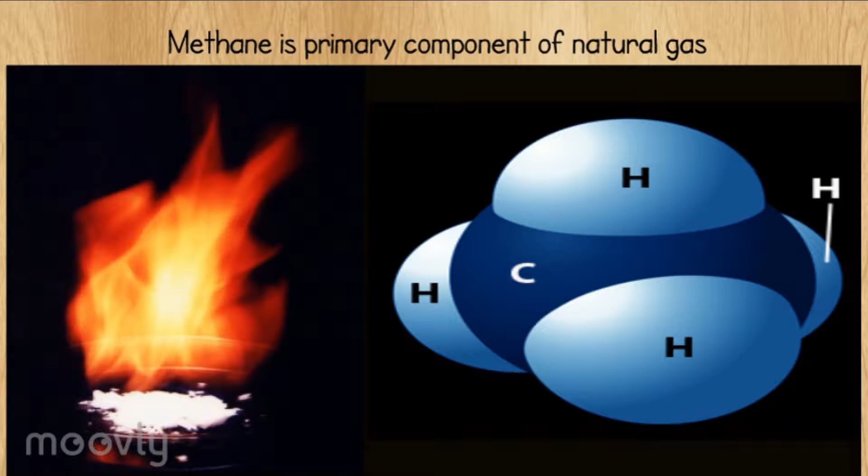Result of burning methane. Methane is a primary component of natural gas. Methane chemical reaction. Calorific value of natural gas. Natural gas has a calorific value of 43 megajoules per cubic meter.

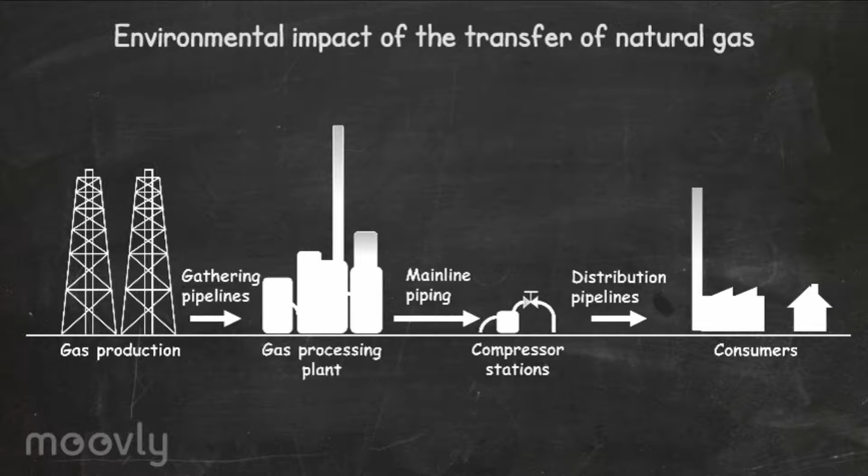Natural gas can be transported on land and under the water by pipeline, or on water via ship. There are basically three types of pipelines: the gathering, mainline and the distribution systems. LNG is most commonly transported with vessels, which contain fixed LNG tanks for coast-to-coast transportation.

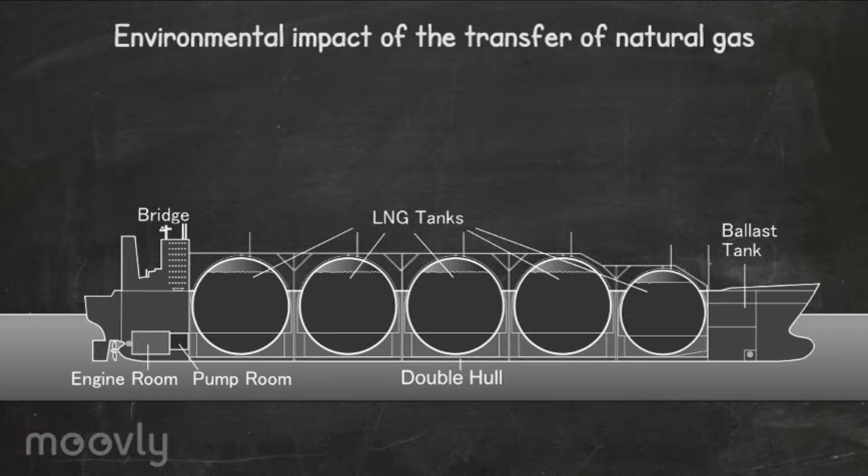In the port of departure, the natural gas is liquefied and pumped into an LNG carrier. Because the LNG tanks cannot be made completely insulated, part of the liquid natural gas vaporizes. This phenomenon is called boil-off. On older vessels, boil-off gas is used in a turbine to power the ship, and if more gas is needed, the additional gas must be vaporized from the cargo.

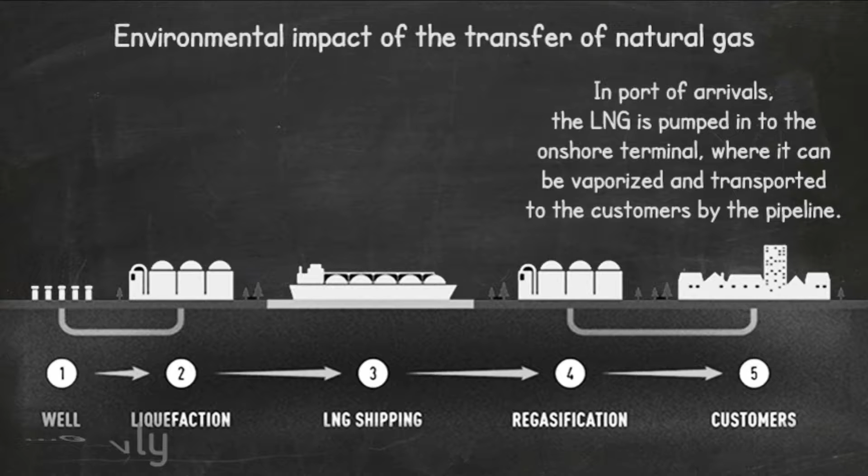The newest vessels have a boil-off gas reliquefaction system, so boil-off gas can be liquefied back into the LNG tank. In the port of arrival, the LNG is pumped into the onshore terminal, where it can be vaporized and transported to the customers by pipeline.

Positive environmental impact of the transfer of natural gas. When natural gas can be transferred to the customers, they can use the cleanest fossil fuel in the world. By using natural gas for industrial applications, transporting and housing, the generation of fine particles and harmful compounds can be reduced significantly. Negative environmental impact of the transfer of natural gas.

Because methane is a 23 times more powerful greenhouse gas than carbon dioxide, leakages in pipelines and LNG boil-off gases cause serious issues to the ozone layer. Old mainline pipes are made of cast iron, which are aging, and the probability for pipeline damages increases all the time. American gas suppliers have reported half to 10% losses in pipelines, but clear facts and figures are not available.

When there is need to build a shore-to-shore underwater mainline, construction could cause release of toxins from the seabed. In LNG transporting, there are also environmental problems. A part of boil-off gases may release to the atmosphere, and energy losses in the liquefaction process are 10% of the total amount of energy of the gas, because natural gas has to be cooled down to under -160 degrees Celsius.

It has been said that natural gas is the cleanest fossil fuel on the planet, but the resulting leakage emissions of the transfer make its environmental advantages disappear when it is compared to other fossil fuels. Natural gas emissions in traffic. Worldwide there were 22.7 million vehicles running with natural gas in 2015, led by China with 4.44 million vehicles.

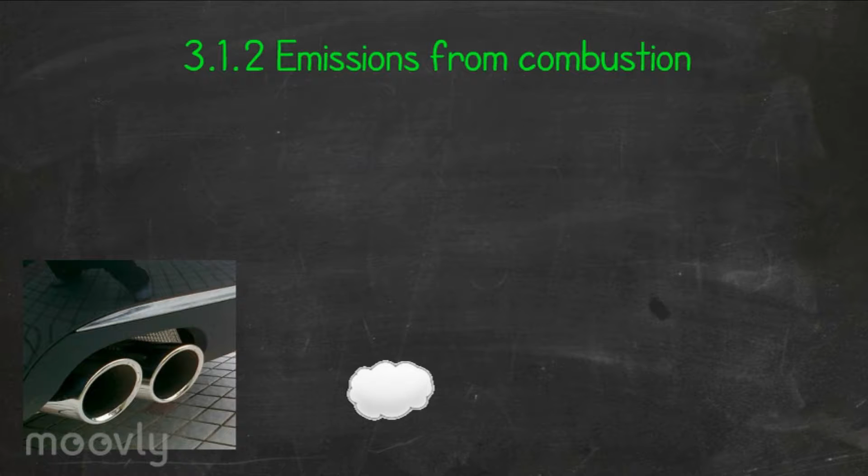Natural gas in vehicles uses compressed natural gas, CNG, or liquefied natural gas, LNG, as a cleaner alternative to other fossil fuels. Natural gas has the highest energy-carbon ratio of any fossil fuel, and so it produces less carbon dioxide per unit of energy. When combusted, natural gas only releases a small amount of flue gas, because it is composed of over 90% methane and it burns clean. If combustion is clean it will only generate water and carbon dioxide. It doesn't produce ash particles like oils do.

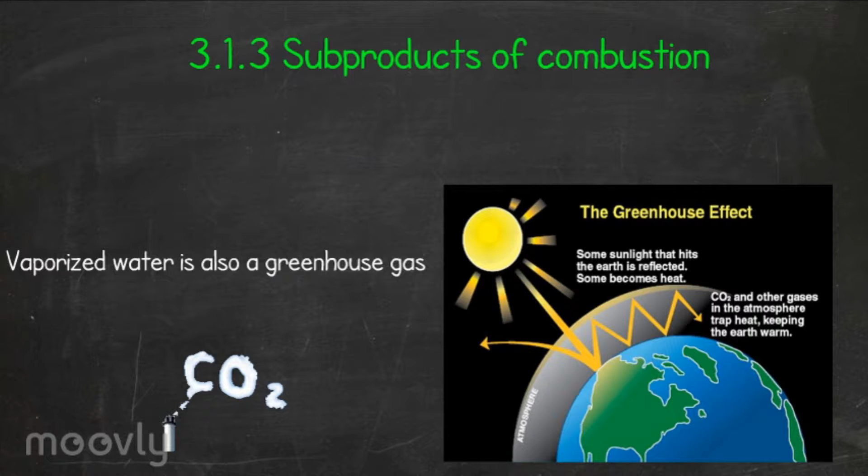The most important emission is CO2 emissions. CO2 is a greenhouse gas which causes atmosphere heating. Water vapor is also a greenhouse gas, but there is no emission standard for that. There are always some harmful emissions when the combustion isn't perfect. Natural gas has the least carbon dioxide emissions compared to other fuels. It has the best value in terms of other fuels.

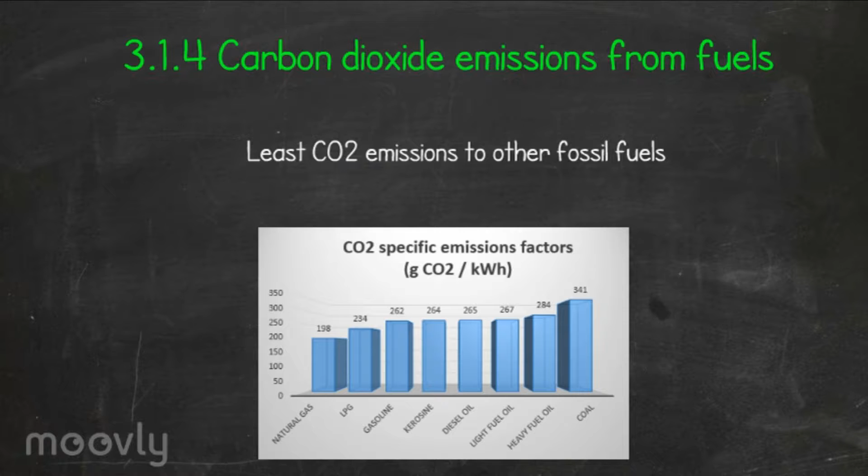Carbon dioxide emissions are 25% lower than with heavy fuel oil. NOx emissions are 90% lower. There are almost no SOx emissions with sulfur-free natural gas. Natural gas-fueled vehicles are also quieter. Emissions are reduced considerably with CNG usage. CNG is better for the environment than diesel.

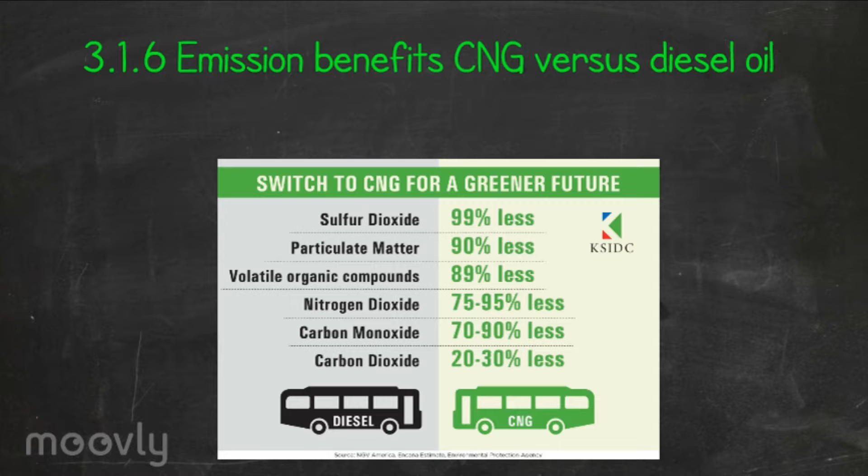In vehicle inspection, a flue gas analyzer is used to measure CO, CO2, HC and O2 emissions. Other emissions like NOx, SOx, volatile organic compounds and particulate matter are analyzed in a laboratory. Small portable laboratories like PEMS can be used for this as well.

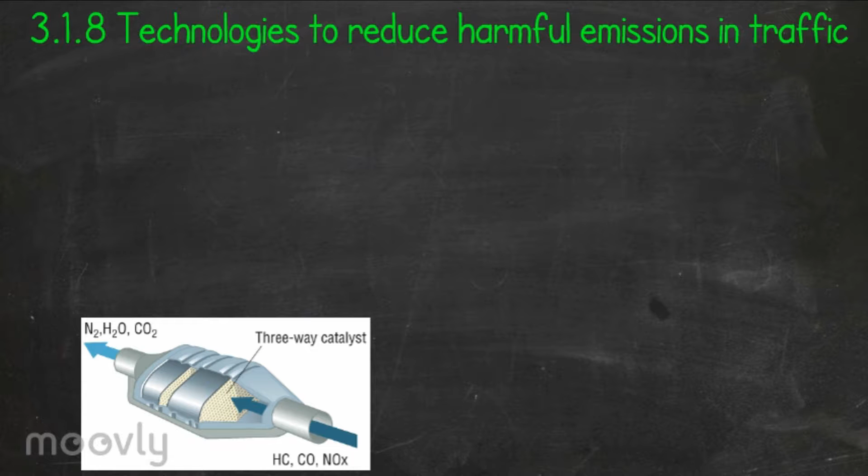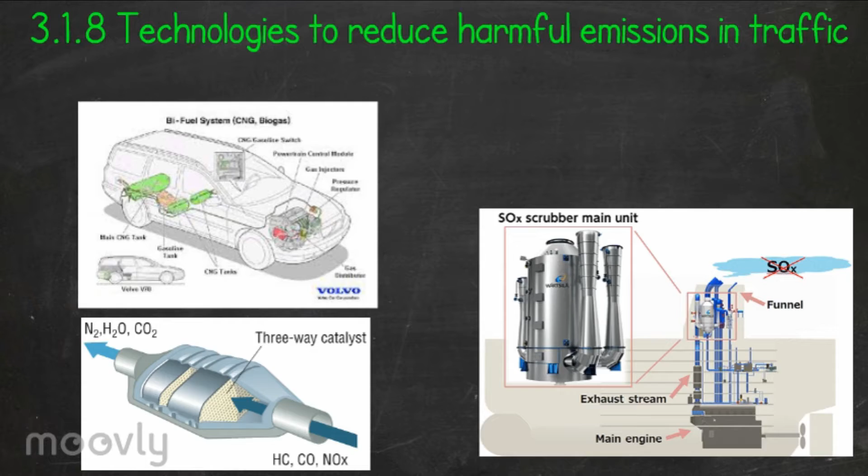In cars, a catalytic converter is used to reduce harmful emissions in combustion of biogas and bi-fuel. In LNG ships there is no need for scrubbers to reduce sulfur oxides. On land vehicles, natural gas is taxed either by CO2 emissions (g/km), told by the manufacturer, or by the car's weight, cents per 100 kilograms a day. At sea, LNG is bought abroad, so there is no tax, only the fuel price.

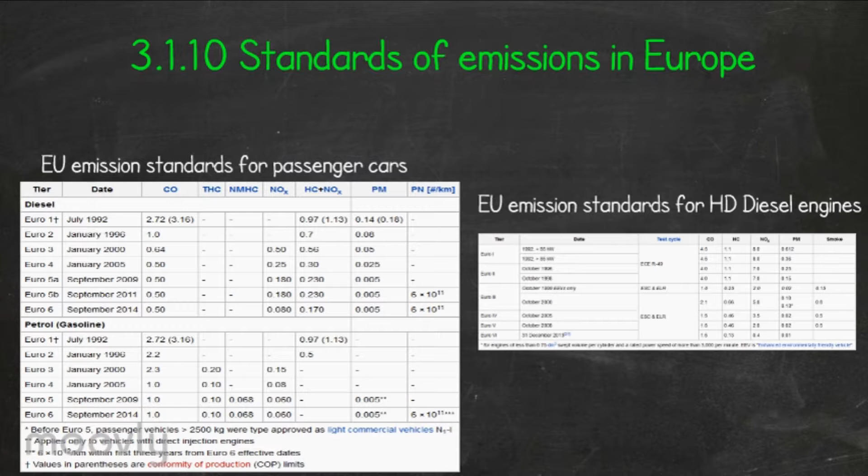The European Union has its own set of emission standards that all new vehicles must meet. At the moment standards are set only for road vehicles. No standards apply to ships or airplanes. For each vehicle, a different standard is in use.

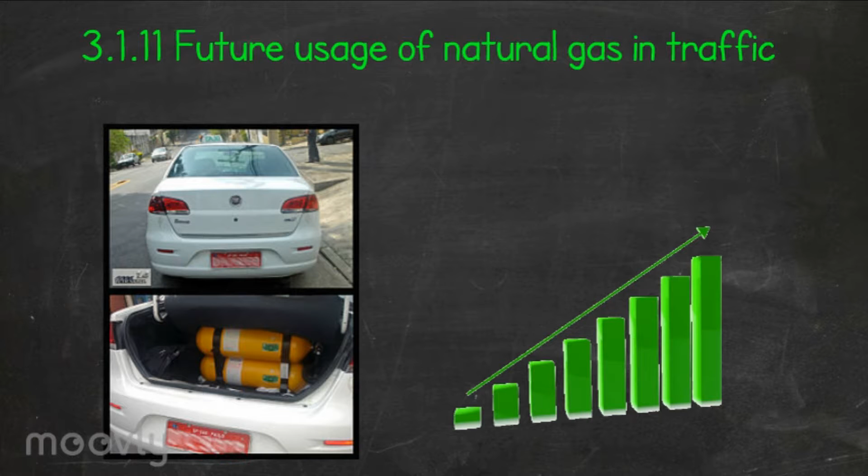In the future CNG and LNG usage in traffic will increase. Bi-fuel cars will become more common. Natural gas causes less harmful and toxic emissions than traditional fuel and is becoming easier to attain. In the future, there will be more filling stations for land vehicles.

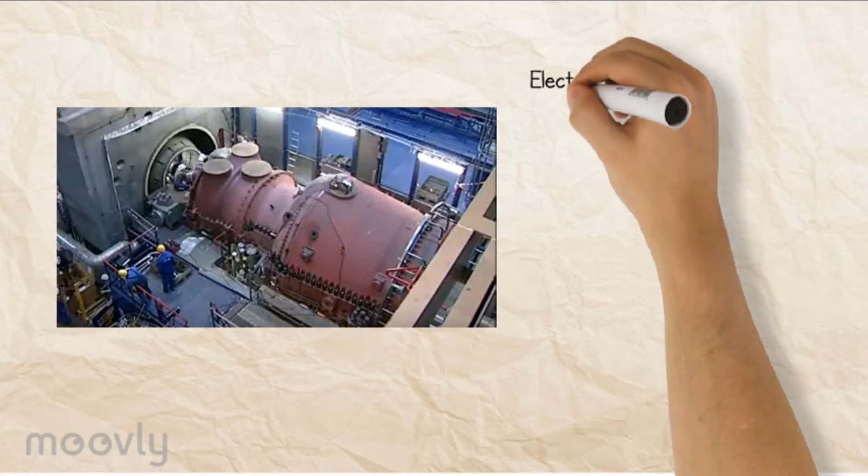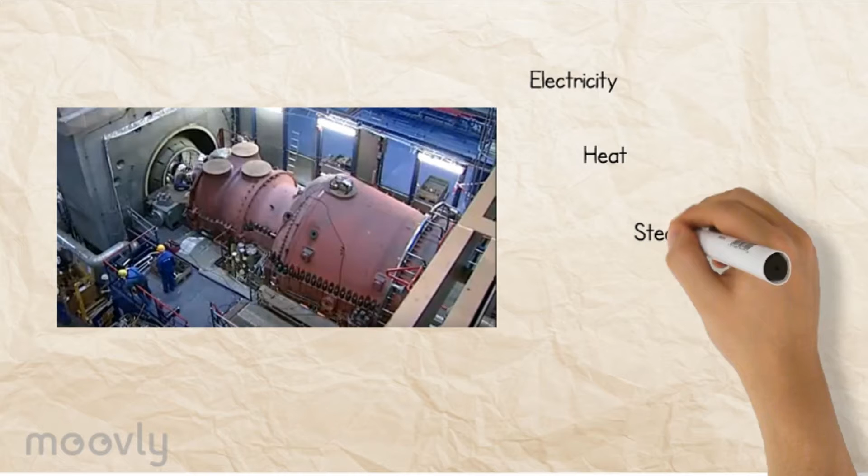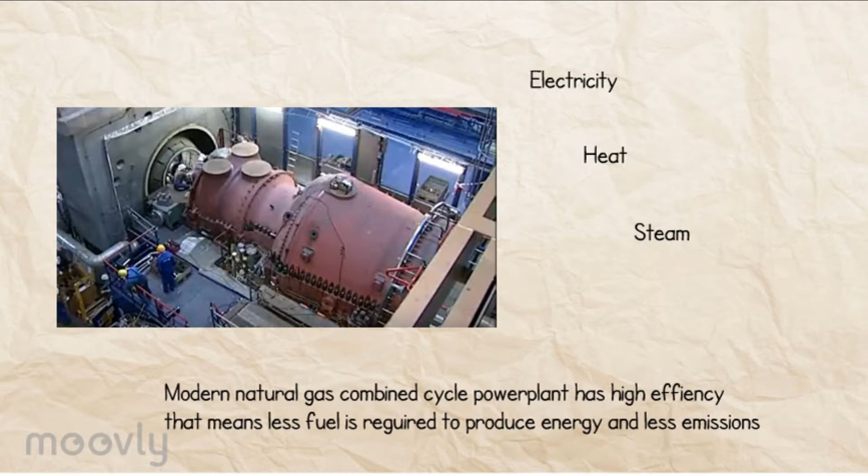My name is Jari Hietanen and I tell a little bit about the power industry. Electricity generation and heat production is one of the primary uses for natural gas. Gas turbines and boiler power plants are the two most common methods. In a boiler power plant, steam is produced by heating water. Thanks to good automation, efficiency is at a good level and the production's emissions are lower than before.

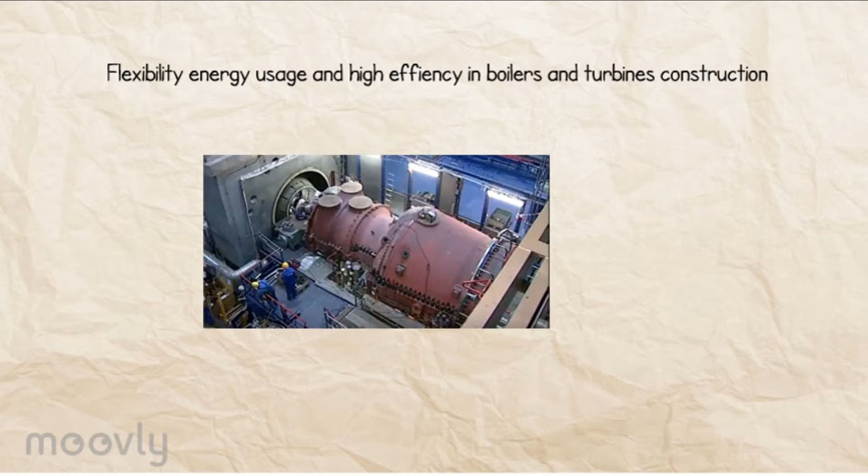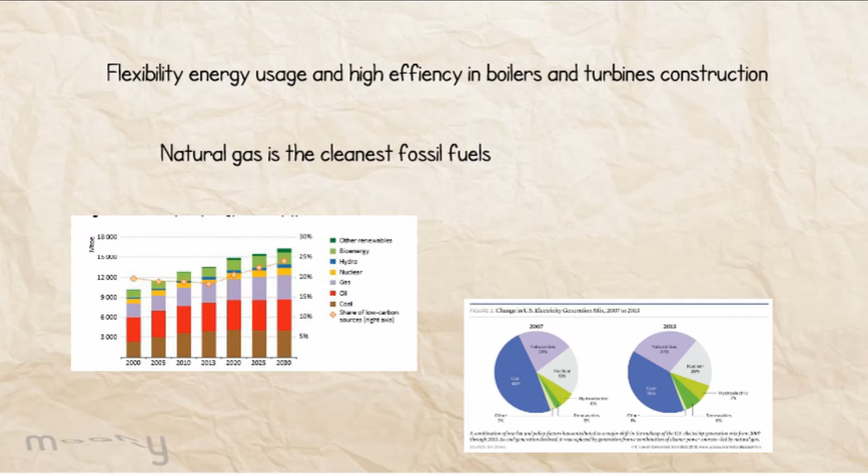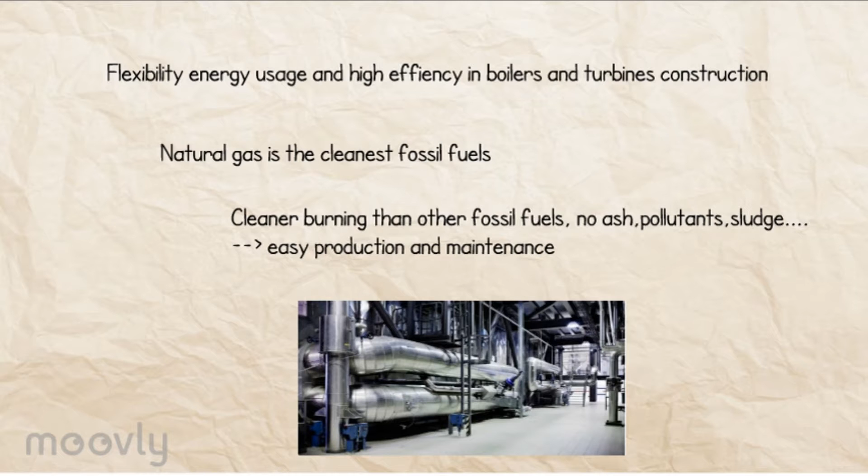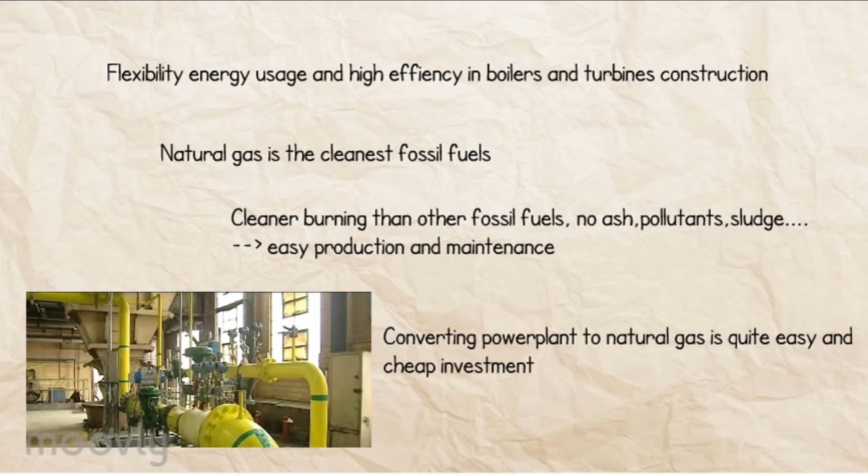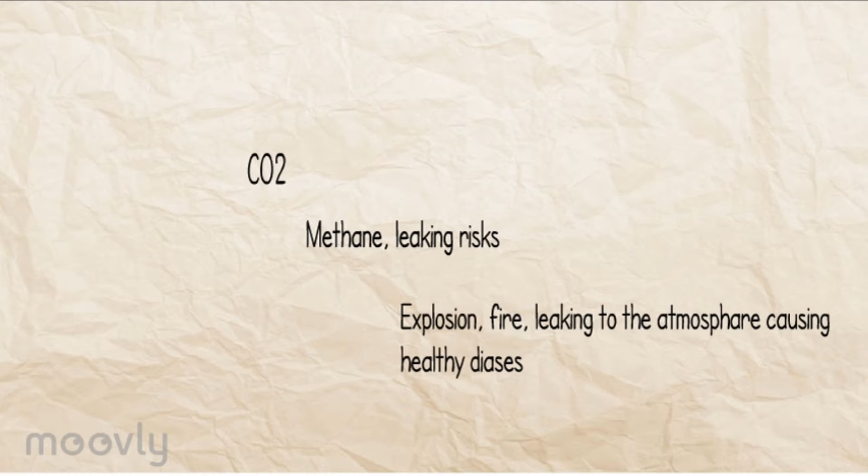However, the combustion of natural gas produces carbon dioxide, almost half of what coal combustion does. Natural gas consists almost entirely of methane, a major greenhouse gas. If gas leaks while in use and escapes into the atmosphere, methane traps heat almost 21 times more than carbon dioxide. When gas is used, there are always risks of, for example, explosion. But in real life, natural gas is quite safe to use.

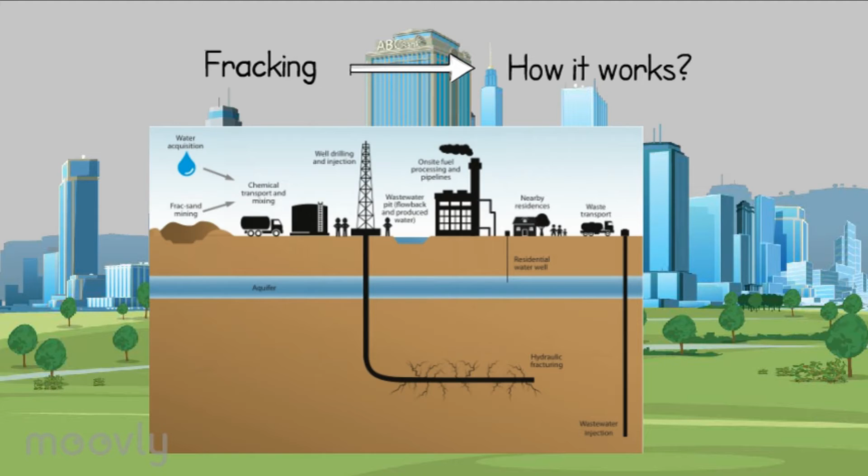Environmental effects of natural gas. How to get natural gas. Risks of fracking: groundwater contamination, pollution and its impact on climate, exposure to toxic chemicals, waste disposal, gas explosions.

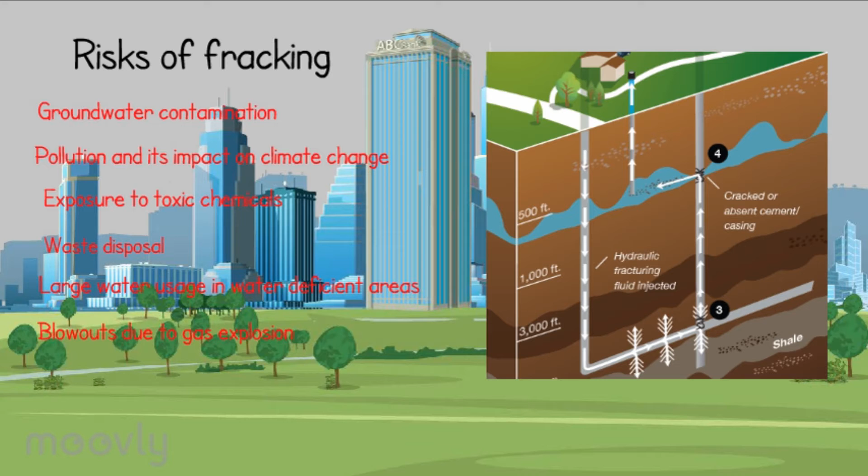Environmental impacts: ground and surface water contamination. Large power plants and extraction sites affect animals and plants. Excess water use, negative impact on life in water. Possible land resource impacts such as erosion and landslides. Greenhouse gases, low magnitude seismic action. Transportation overseas, potentially very dangerous.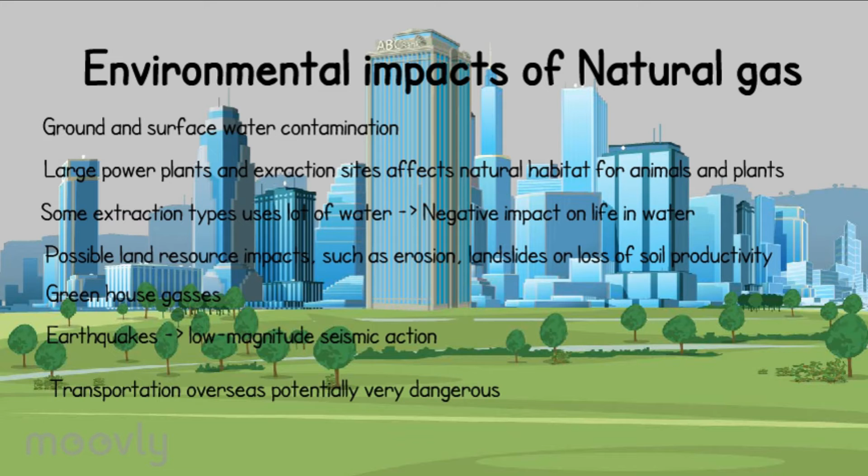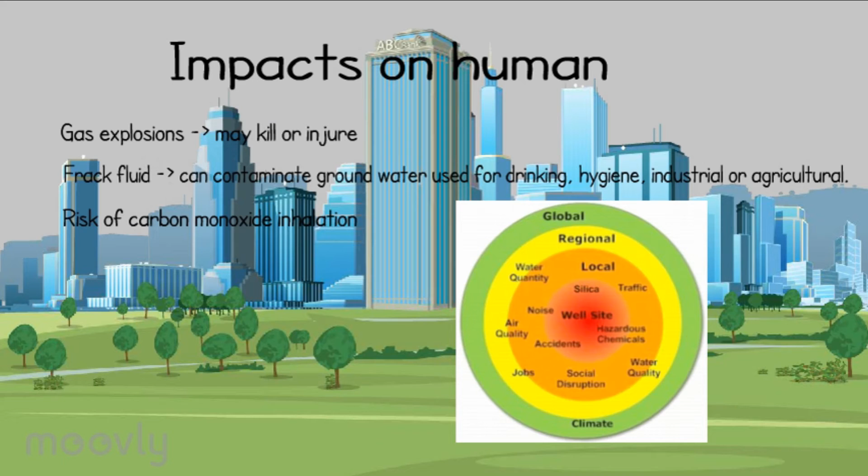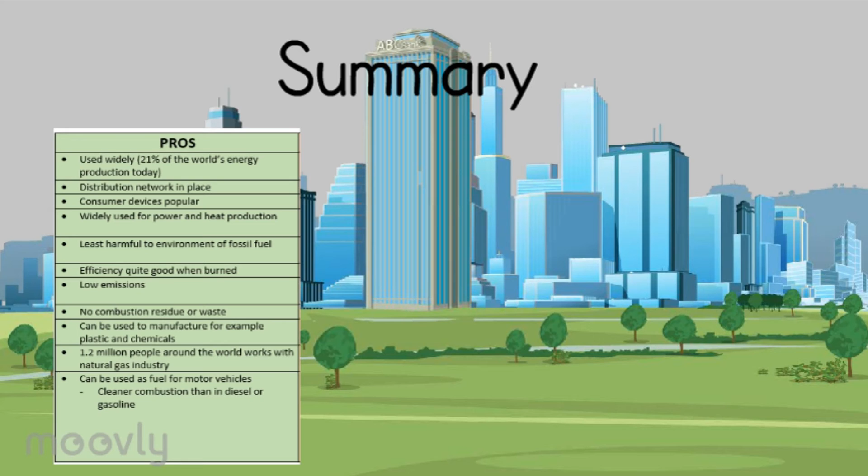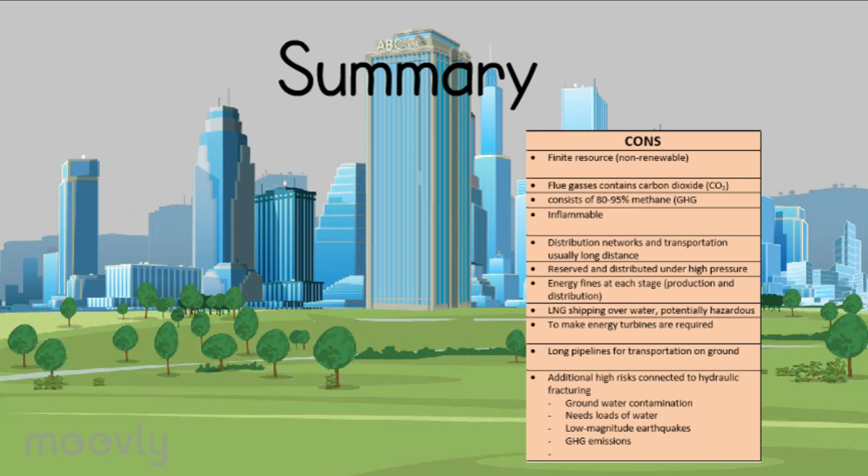To make energy, turbines are required. Long pipelines for transportation on ground. Additional high risks connected to hydraulic fracturing: groundwater contamination, needs loads of water, low magnitude earthquakes, GHG emissions. Thank you for watching.